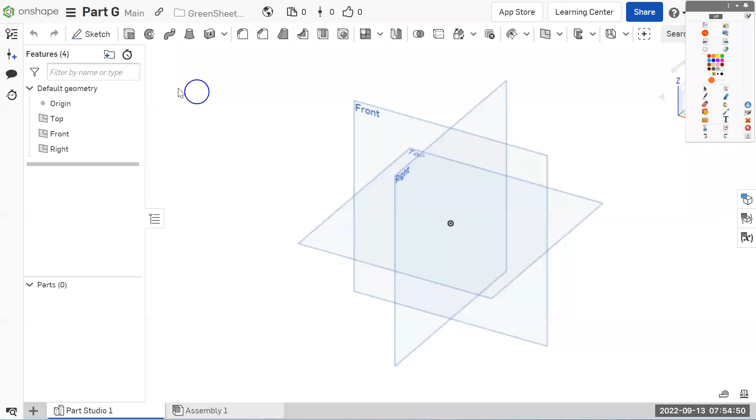So like I said, our first rectangle is going to be 3 tall and 2 wide. Let's go ahead and start a new sketch. We're going to sketch on the face called front.

Okay, and you can tell it's red here, means we haven't selected it yet. So now we have a working sketch. That sketch plane has showed up. And we're doing a 2-dimensional thing. Let's look at it straight on.

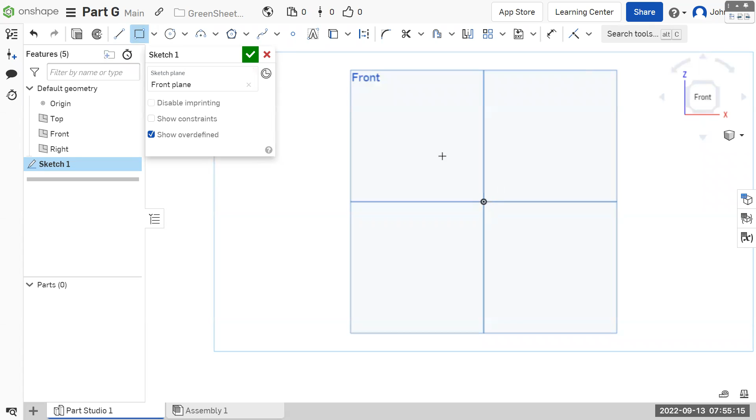And let's get our basic corner rectangle. For these simple things, it doesn't have to snap to the middle, but it's a good practice to do that. So we'll set a rectangle of any size, roughly the right size, and we'll make its width 2 and its height 3. And we can finish the sketch.

We'll look at it from a corner. And at this point, we can turn off these origin planes because we just have our thing there.

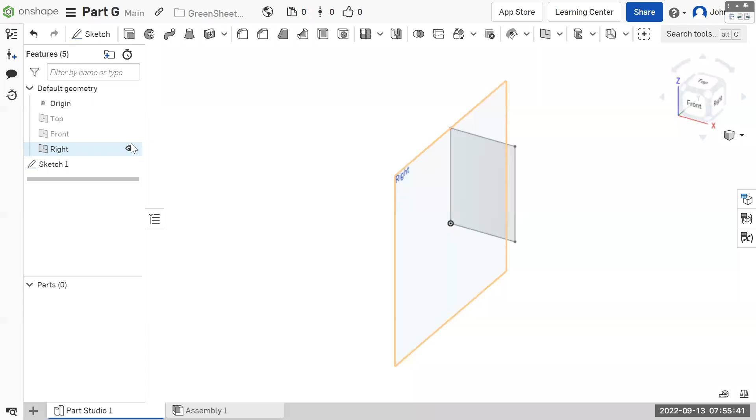Let's go to our basic extrude. What do we want to extrude? It's still red, we need to tell it what we want to extrude. In this case, it's the rectangle we drew. And like we said before, the depth is 5 front to back.

Okay, and this dot right here is the origin dot for the center of everything. And we can turn off the visibility of that as well.

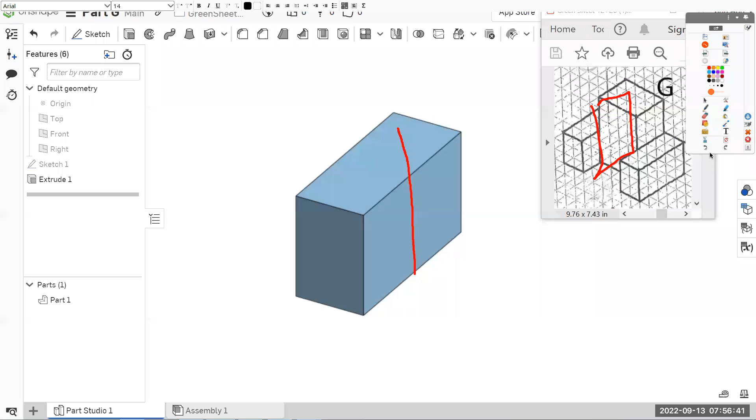Okay, so next step, we need to draw or model the middle part here, which if we draw on, come on pen, we're going to make this middle block, but we're going to draw it on this side of what we have. I don't know what's going on, a pen.

Let's see what we got here. Okay, so if we draw on this side, it's going to be roughly this shape. And that is going to be sort of whatever we can guess this is going to be. We assume it's solid all the way down.

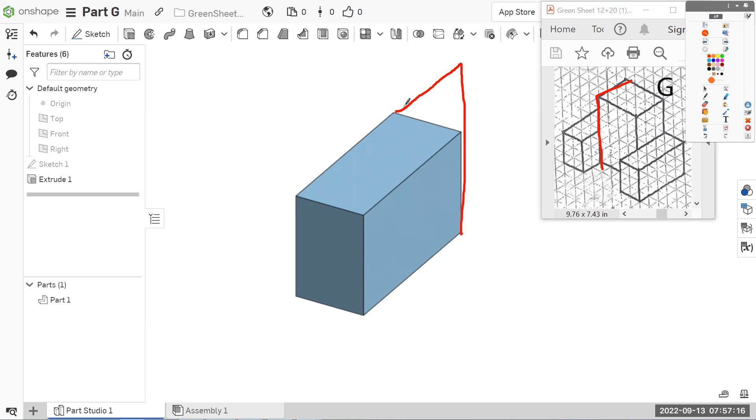So starting in this back corner, our rectangle is going to be the full height, which is 6. Okay, you know this top face is 6 off the ground, and it's 3 front to back. So we're going to go 6 tall and 3 wide, or technically this is depth since we're looking at it on the front. And then we're going to extrude it left to right, this width, which is 4.

Okay, so we're going to start a sketch and we're going to start on this face. And we're looking at it from the right side. Let's look at it from the right side. Zoom out a little bit.

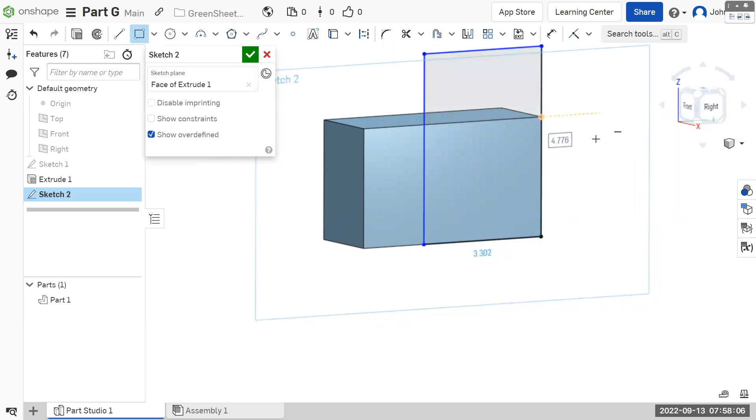And just, I would say always sketch when you're looking at it straight on, but just to show you roughly where we are, I'm going to do it a little bit off of straight on, just so you can see. And we're sketching, we're going to start over here and go up. And the dimensions of this, like I said, are 6 tall.

And 3 deep, because we're working front to back. We'll finish the sketch, look at it from a corner, extrude, and choose the square that we drew, but also this one - it forces you to choose both. The distance we're going to extrude is 4, left to right, and a check mark.

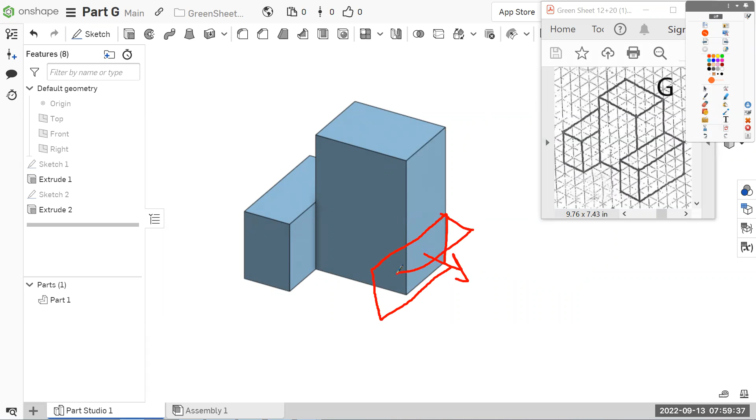There we go. The last portion is just that other arm, which is the same size. We are going to draw the rectangle on this right side. That's going to be 3 tall and 5 front to back. And we'll extrude it 2 so we can make this entire right block.

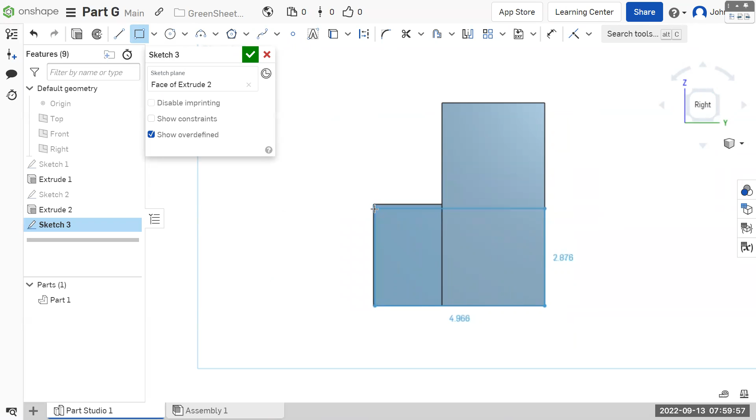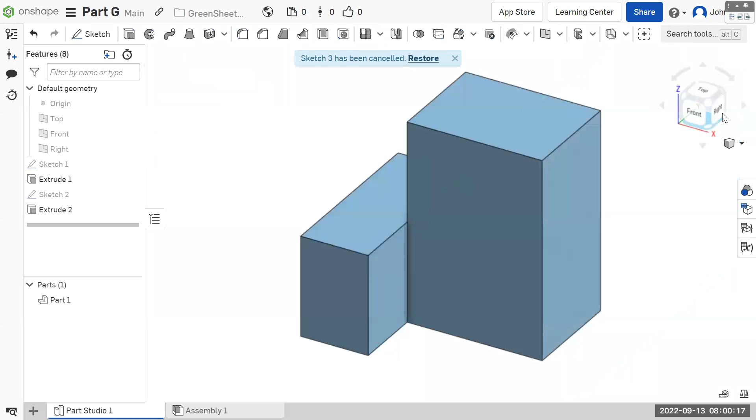So we'll get a sketch on this right side. Look at it straight on from the right. And we'll get a rectangle from this bottom back corner. Is there a project edges option? Let's see if we can project. No, there isn't. Oh, is this construction? No, never mind - I was thinking about other tools from other software.

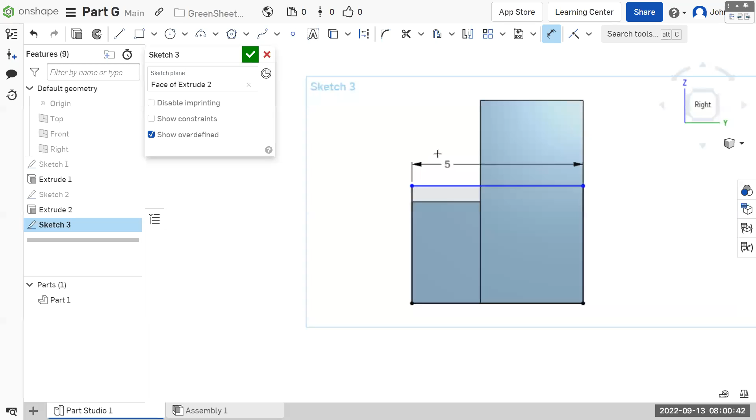So we need our sketch on this right side of everything, and you can see where we're sketching - we're sketching on that side. Let's get our basic 2-point rectangle from here, up and over. Dimension its depth, since we're on the right side it's front to back, and the height is 3. We'll finish the sketch and extrude, choosing both of the areas we created, with a width of 2. And there you go - that's part G.

Let's close the document, and let's create a new document for part H. Part H.

And for part H, we're going to do it the other way, where we start with a big chunk and cut away all the things we don't want.

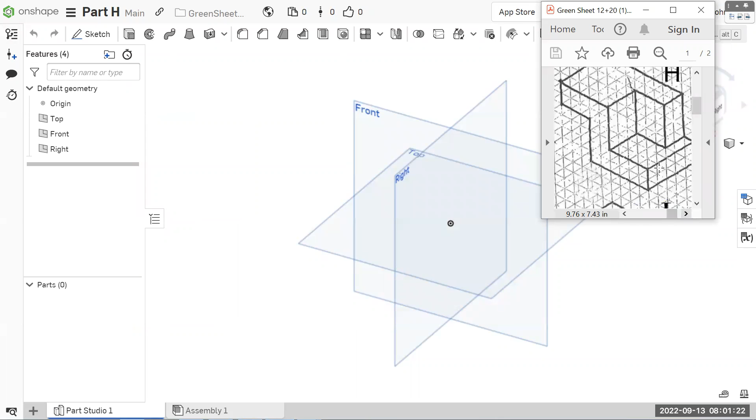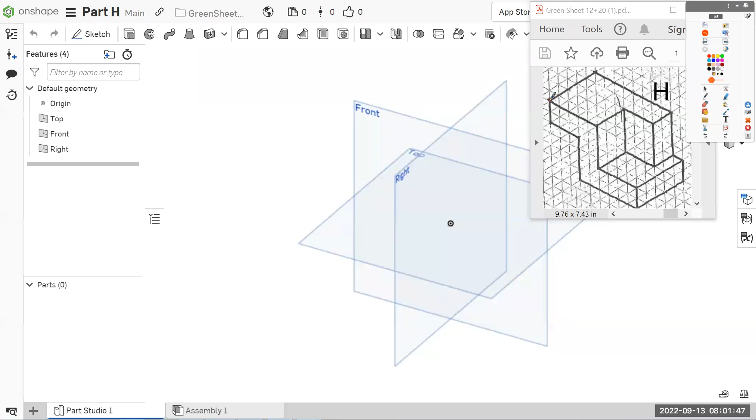For part H, we're going to draw the full block - a rectangle with the total height and total width, and extrude it the total depth. Then, once we have that, we're going to draw a rectangle to cut out everything under there, assuming it's a complete overhang and cutting all the way through. Then we're going to draw this shape on the top and cut-extrude all the way down to that depth.

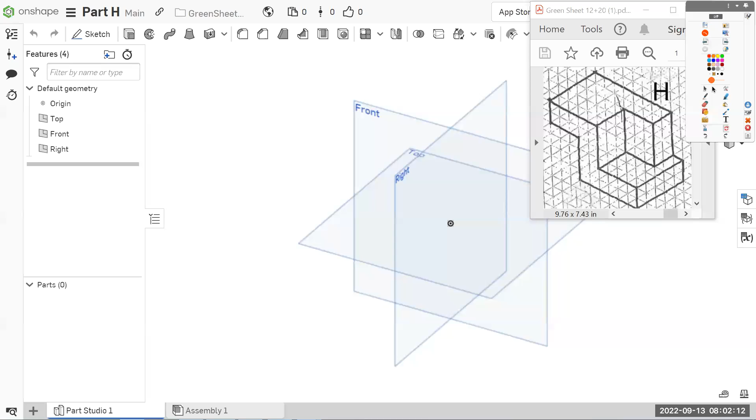Okay, so let's start with a new sketch. We'll draw on the front and look at it straight on. We will remember to check the sizes before we begin. Its height, if this is our origin point, is total 6 - 4 from there and 2 from there. And its total width is 9. So 9 wide and 6 tall.

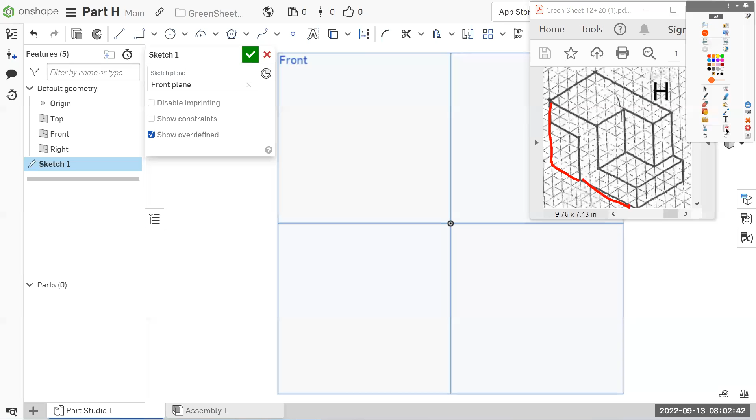And we're back here. Let's get a rectangle and dimension it 9 wide and 6 tall. Zoom out, take a look at it.

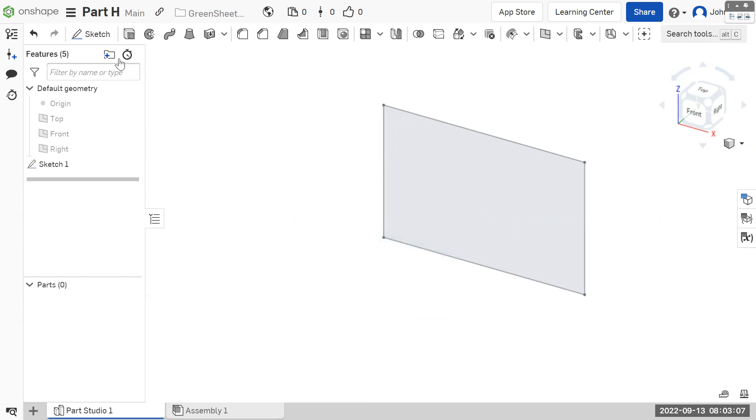Finish sketching - let's extrude. We could turn off the visibility on all these origin planes and points. Let's extrude - what do we want to extrude? We want to extrude the rectangle we made, its depth, which again, I forgot, is 5. So we want to extrude this a distance of 5 front to back.

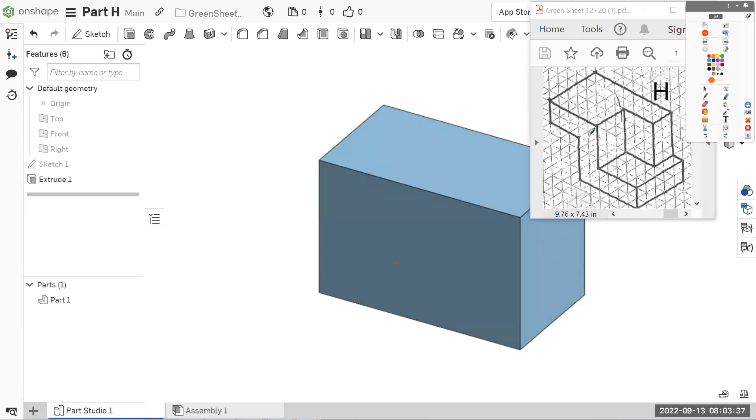And there's our piece of marble that we're going to sculpt by cutting away what we don't want. The first part we don't want is this overhang. So we're going to draw a rectangle from here, this shape, which will be down here, a height of 4 and a width of 3. We're drawing what we don't want. Then, once we're done with that rectangle, we're going to cut-extrude all through all - we don't even need to know the dimension, although it's 5.

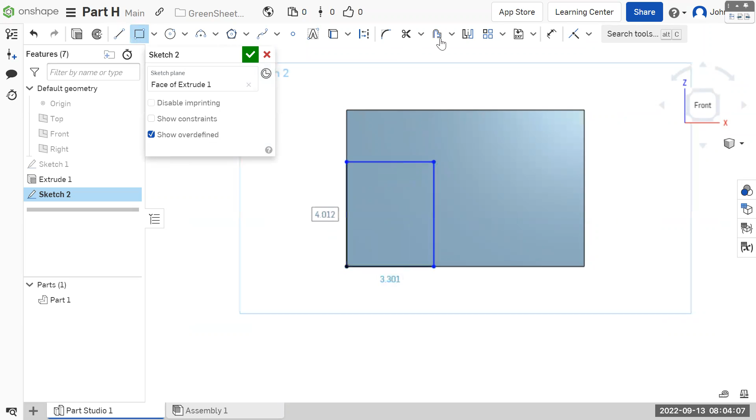So we're going to sketch on the front. Let's look at it straight on. Let's get a rectangle that snaps to this bottom corner, goes up and over. Dimension the width to 3 and the height to 4. Finish the sketch, look at it from a corner because we're extruding. Wish we had different corners or different colors so you could see the rectangle - I guess this is all right.

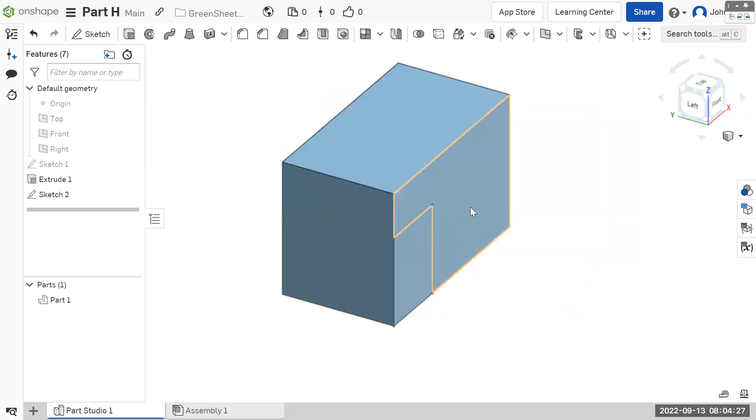The standard corner is front top right, although that puts the shading so that the front is the darkest and you can't even see the edges. I question the default color choices by Onshape, but that's fine.

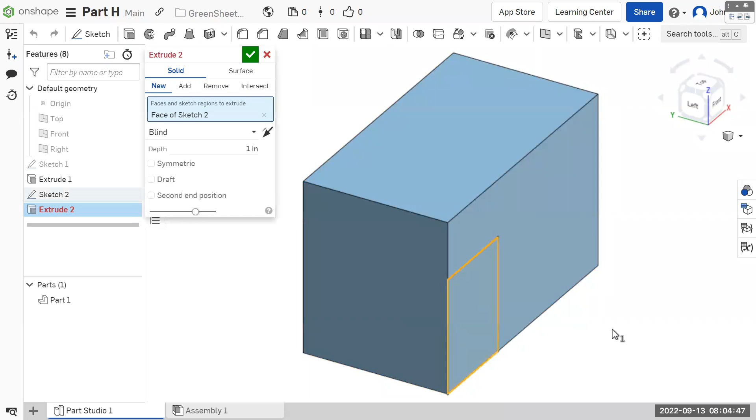So let's extrude the rectangle we drew. We don't want to add material, we want to remove. And we don't have to remove the, I don't know why they use blind, but we want to do through all. I explain why through all is better in one of the last parts, maybe part C, I think.

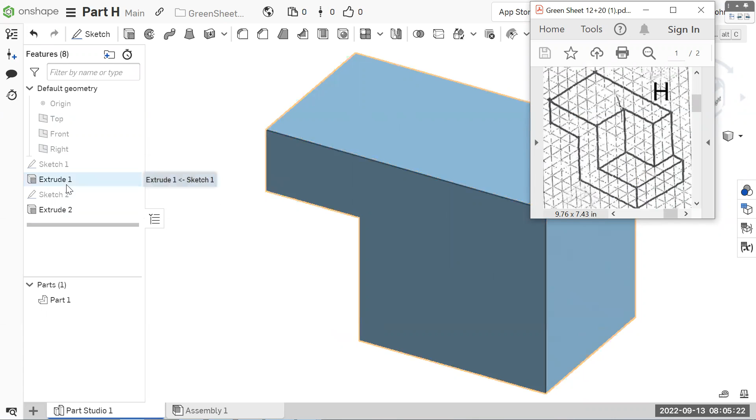Okay, so there's that part. And the only other part feature, which is what every extrusion and revolve is, those are part features, and they use sketches. Like I said before, extrude is going to be the most common part feature. Just for terminology's sake, that's what we'll call it.

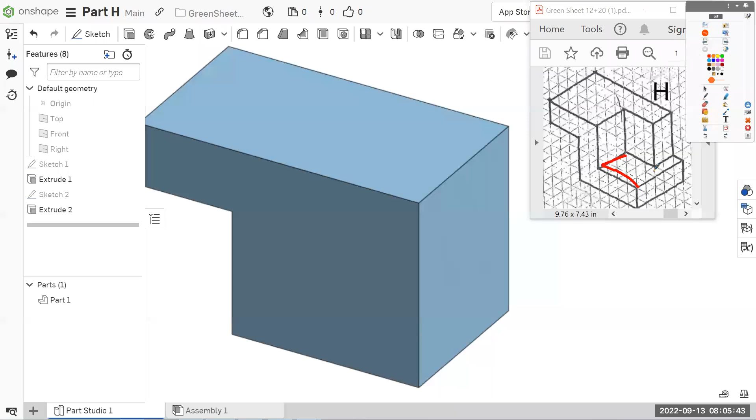So our shape for the last cutout is going to be a combination of 2 rectangles. One of them is 4 wide. This is the shape that we're going to make, and we're going to draw it on this face here. The first rectangle is 3 by 4, and the other rectangle is 1 by 2. When we cut extrude it, that's what we'll be left with.

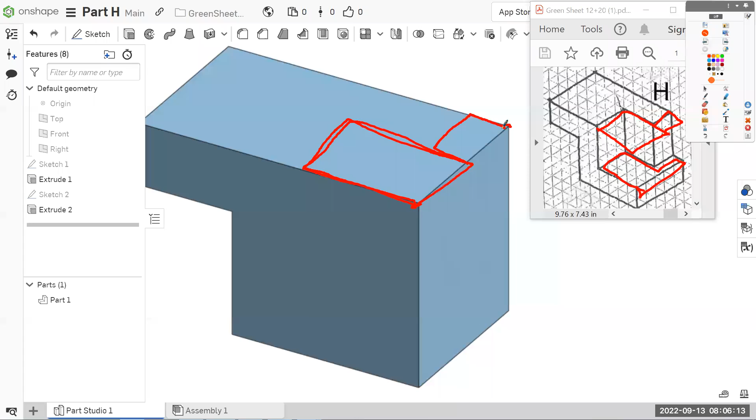So from here, we need to go 4 this way and 3 this way. And then from here, we need to go 1 this way and 2 that way. Combined, we can extrude.

Let's go ahead and sketch. I actually don't mind looking at it from this corner for the simple ones. Actually, never mind, I changed my mind. Let's dimension.

Let's make this one 4 and this one 3. And on the same sketch, we're not finishing sketch, we're getting another rectangle that snaps to this corner. We want to dimension the width of this rectangle to 1, but we don't need to dimension the depth of this, it's already going to be 2.

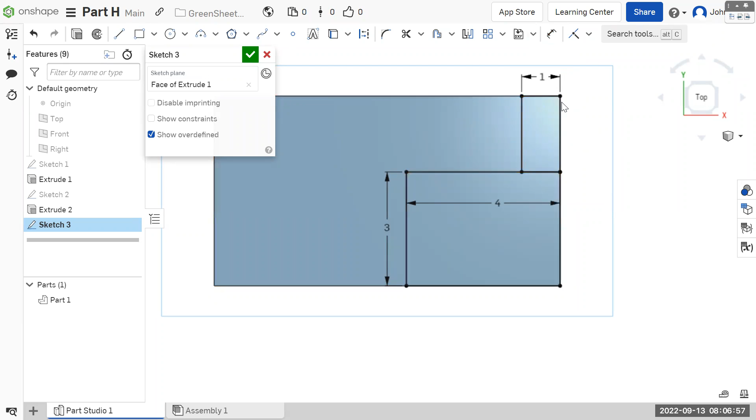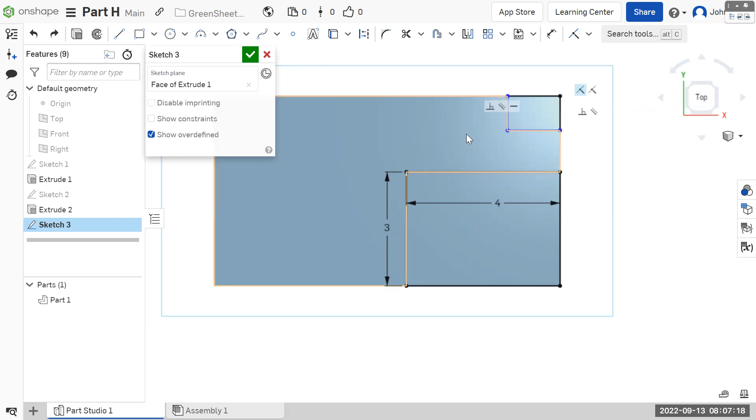It's already constrained. Notice that when I made the rectangle, normally when you make a rectangle, at least 2 lines will be blue. If you put it out here in space, 4 lines will be blue. The blue lines are the ones that are not constrained, not defined yet. The 2 sides of this rectangle are defined because we snap to the corner, but the other sides are not constrained because we don't know how wide or tall it's supposed to be.

However, oh, please bring that back. Ah, shoot. Okay, we'll try again. No, that's that. Sorry folks, let's sketch here. I undid too many things.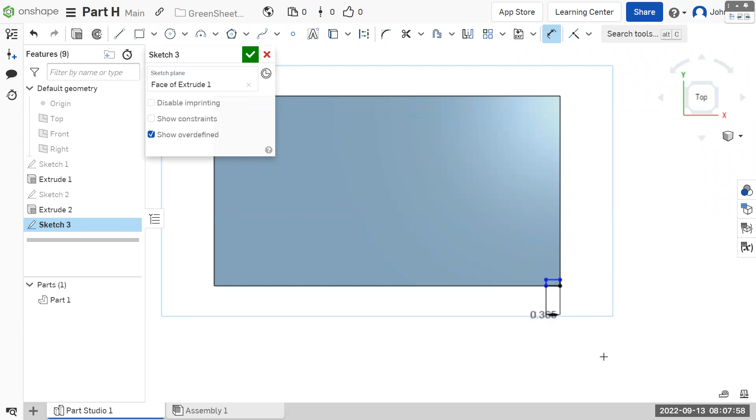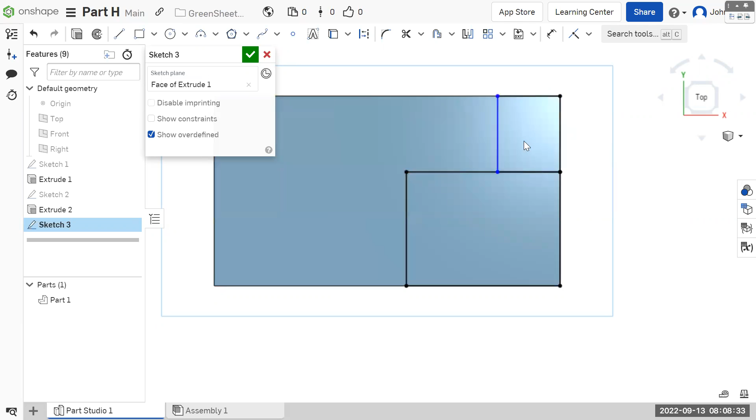Let's snap at 4 this way and 3 this way. Okay, so when you're making this other rectangle, because we snapped it to this top corner, which counts as the top edge, and we snap it to the first rectangle we drew, it is defining it as 2 inches tall. And that's why only one of the lines is blue, because we need to define where it goes this way. We don't need to define the other one because we clicked it to something we knew, and we clicked it to something else we knew, which is where this line is.

So there's that, the width is 1. Now we can finish the sketch. Let's look at it from a corner.

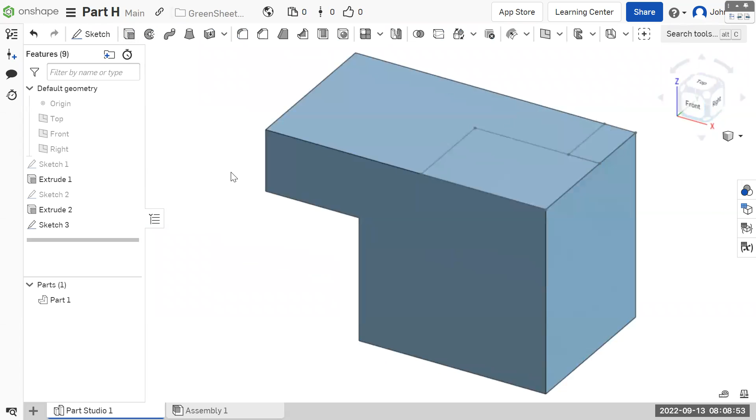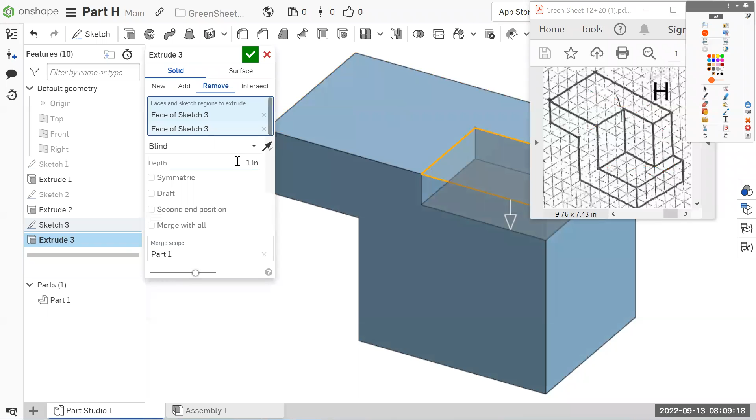Extrude. We want to extrude both this rectangle and that rectangle, but we don't want to add material, we want to cut material, and we don't want to cut all, we just want to cut a height. Since we're on this top face here, and we want to cut until we get to this face here, we need to cut a distance of 1. Okay, and the distance we want to cut is 1. There we go, and there we go.

That's part H. Let me know if you have any questions.